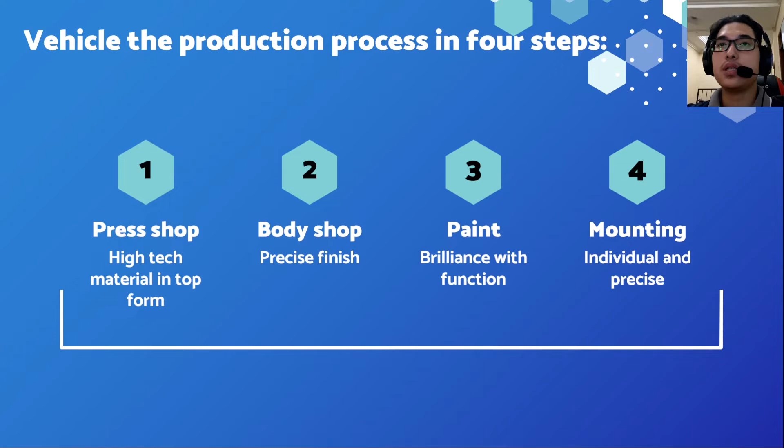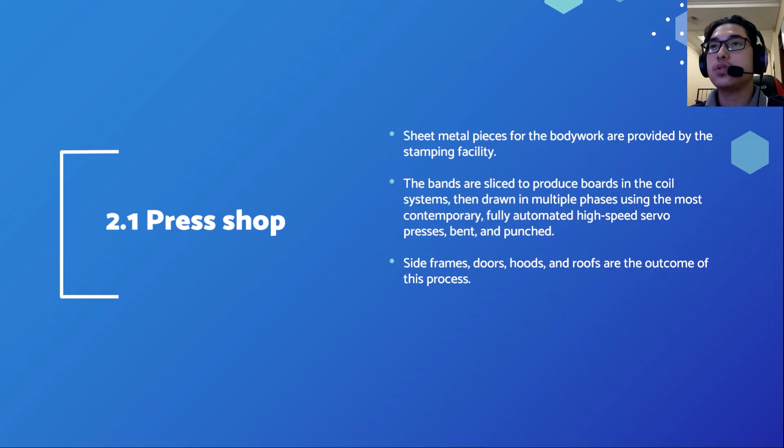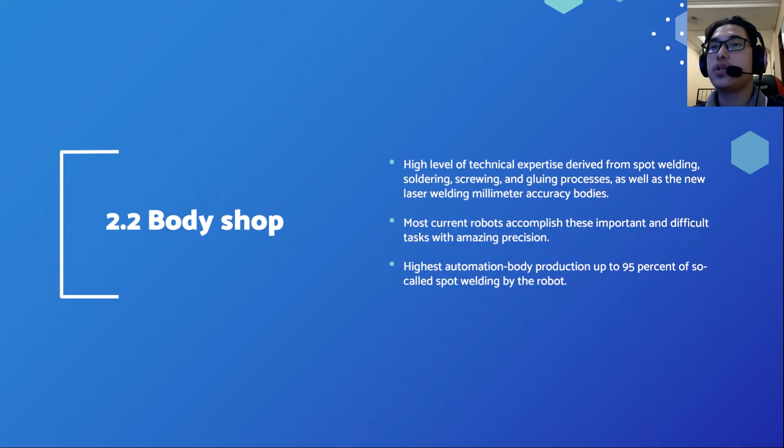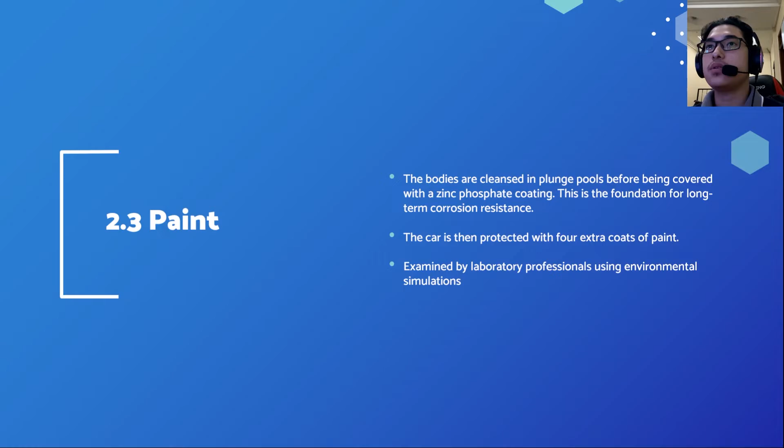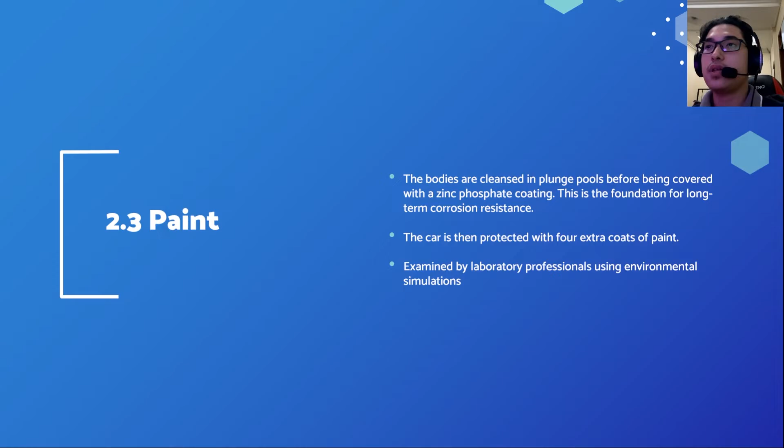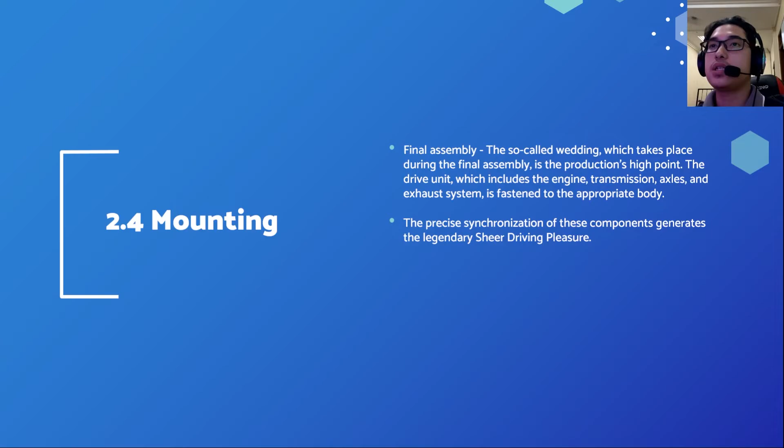And for 2.5 is technology applied. For BMW, it applies additive manufacturing. The purpose is to drive down production cost and timeline so that the company will make more profit. It starts with Henry Ford, the inventor of the assembly line. The automobile industry has long history in developing and implementing the technology to improve the production efficiency. But recently, automotive makers resorted to additive manufacturing because it takes a digital model and prints it layer by layer to create a part or object of the product.

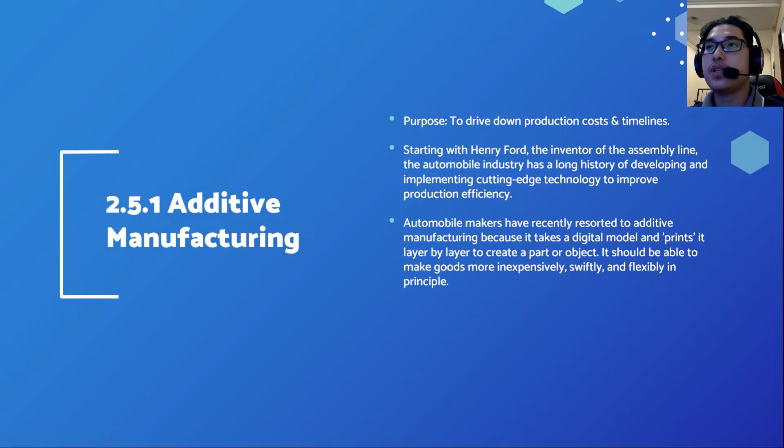It should be able to make goods more inexpensively, swiftly, and flexibly in principle. How is this applied in BMW? The company's primary aim with AM is to reduce cost and time, allowing it to bring new goods to market faster and for less money, as well as to create items for less money. This will make the company more profit.

Unlike with other methods, digital models can also be tweaked and changed instantly. Once successfully prototyped, BMW claims that AM has the potential to significantly reduce production time, as it is claimed to be 5 to 10 times faster than current technologies in the market. That's all for me, thank you.

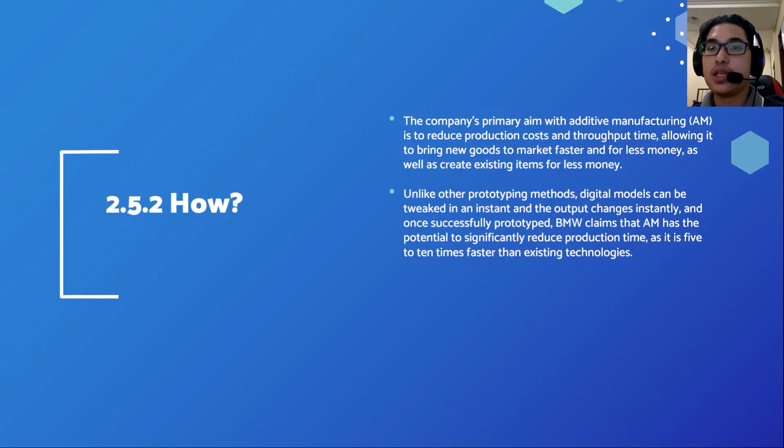Now that we have presented about how the manufacturing process works, I will present about the defects or quality issues that occurred or can occur during the process.

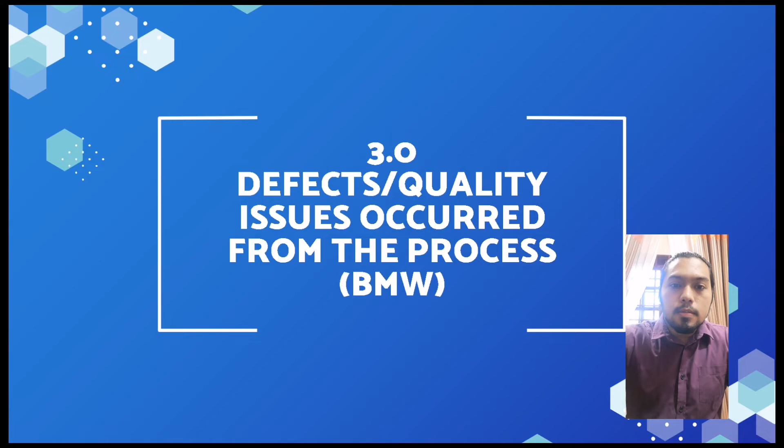As we have told about the press shop, there is a stamping process that happens in the press shop. This stamping process can give many side effects, but there are three common side effects that can occur during this process. First is wrinkles. Second is splits and risk of splits. And the third one is spring back.

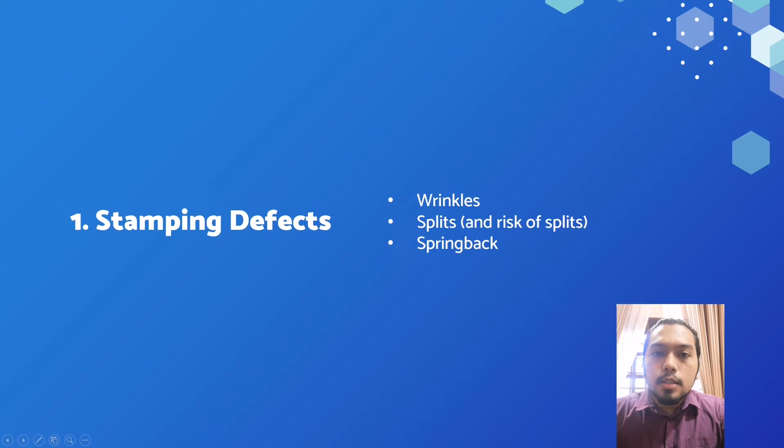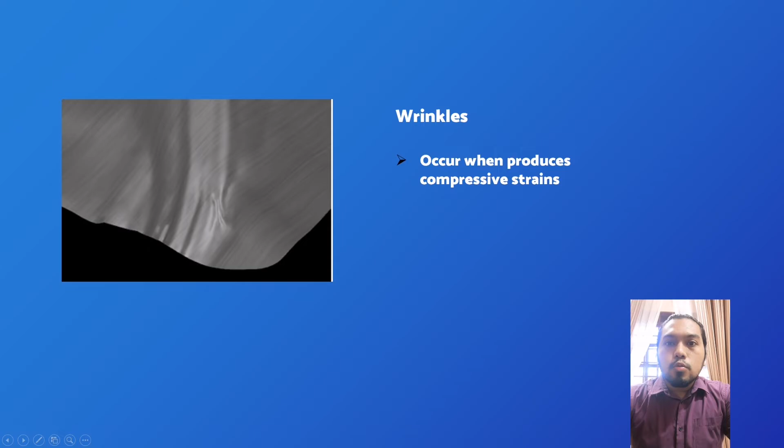Okay, we go to wrinkles. Wrinkles occur when the sheet metal stamping process produces compressive strains that push material together. This will cause the material to overlap with each other.

Next we go to splits and risk of splits. Splits occur when the strains cause the material to become thin beyond the material's safe limits. To resolve the issue, we must make a careful consideration of the material types and material thickness.

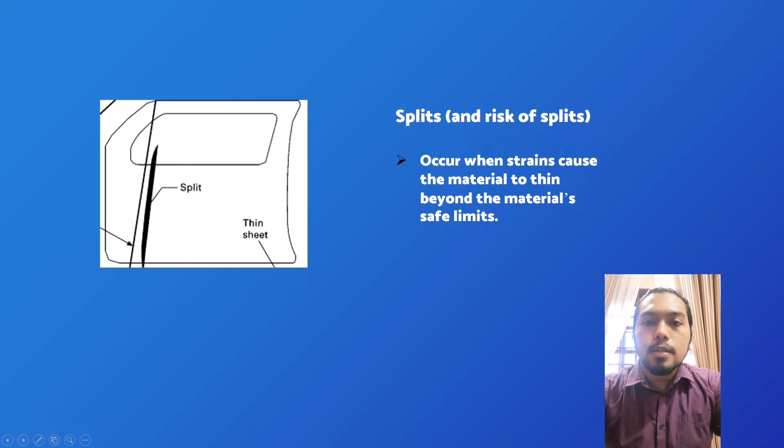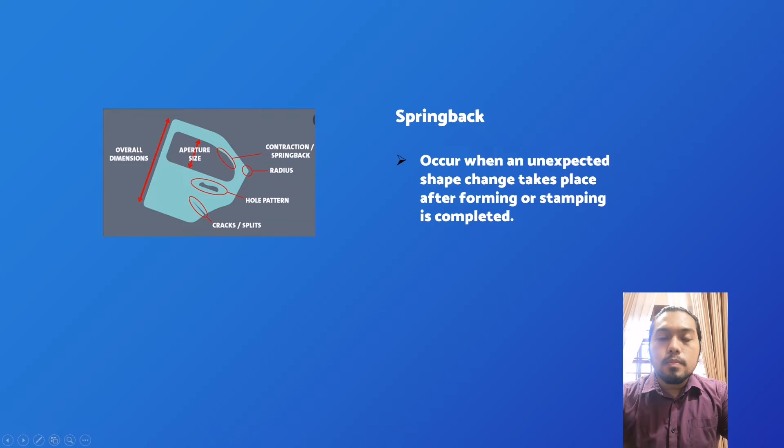The last defect of the stamping process is spring back. Spring back occurs when an unexpected change of shape takes place after the forming or stamping process is completed.

Now we go into assembly defects. As the assembly process includes soldering, brazing, and spot welding, there is a variety of defects that can occur, including cracks, porosity, slag inclusion, and gap or flush.

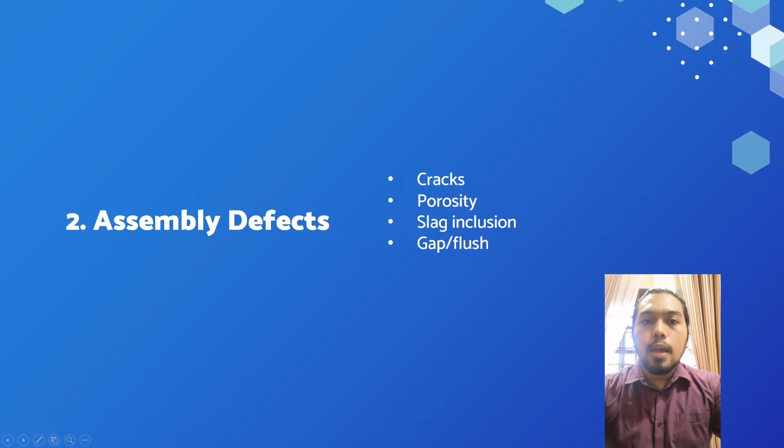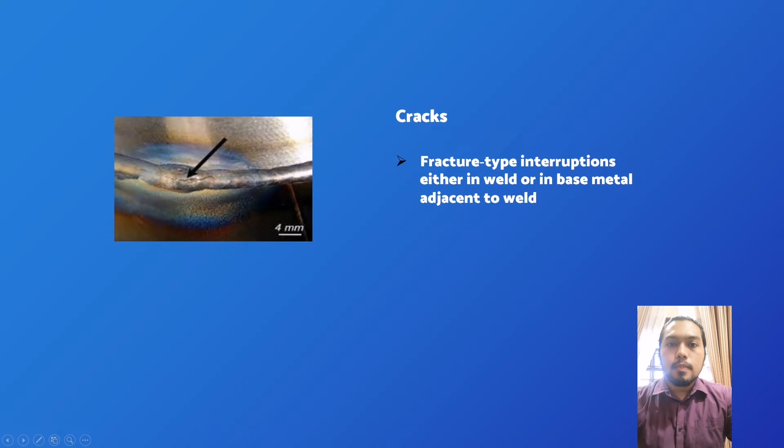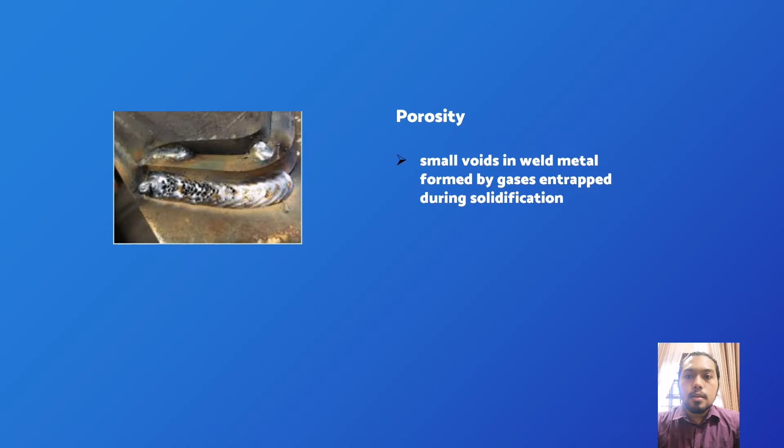First is crack defects. A crack is a fracture type interruption that occurs in the weld or in the base metal. Next is porosity. Porosity is small voids in the weld metal formed by gases that are entrapped during the solidification process.

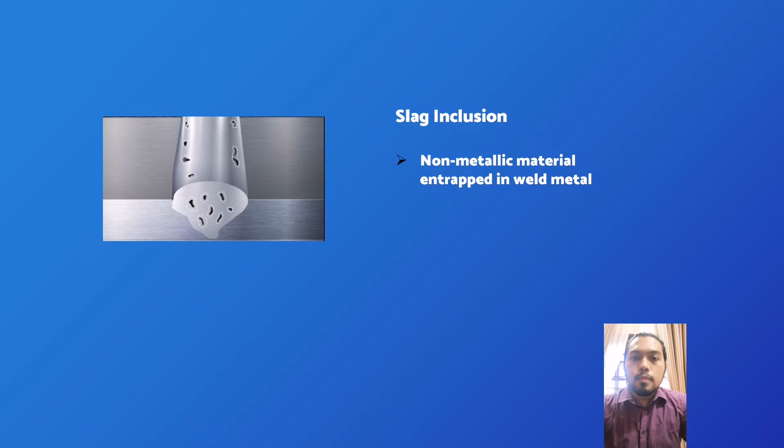Next is slag inclusion. Slag inclusion is almost the same as porosity, but slag inclusion is when a non-metallic material is entrapped in the weld metal.

As the assembly process also includes soldering and gluing, these are the other types of defects that can occur during the assembly process, such as sunken joints, shadowing, solder shorts, incomplete joints, or using too much or too little adhesive.

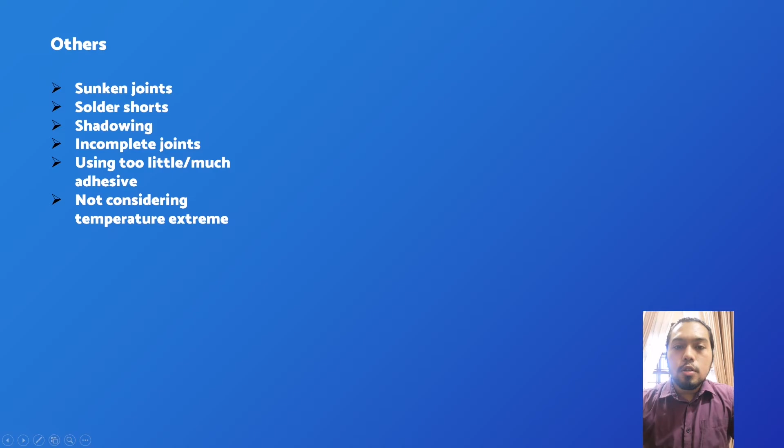For the last one is gap and flush. The fit alignment of body panels during assembly can create a gap and flush defect that happens during the press shop where the stamping process happens. When the stamping process that creates the door or roof has a manufacturing defect, this gap and flush can happen when the assembly process is in working.

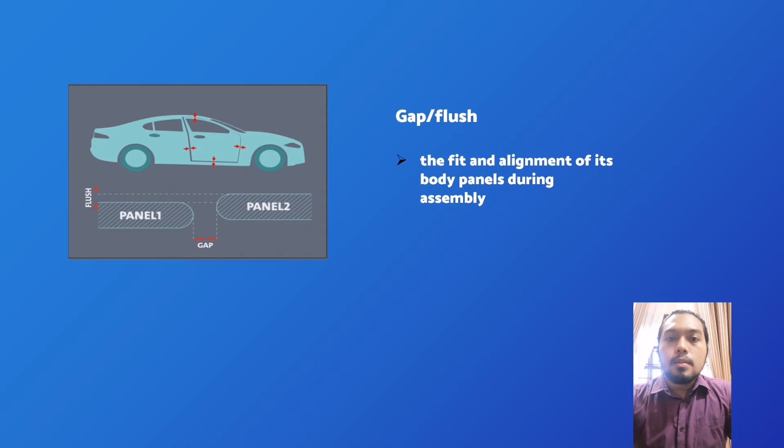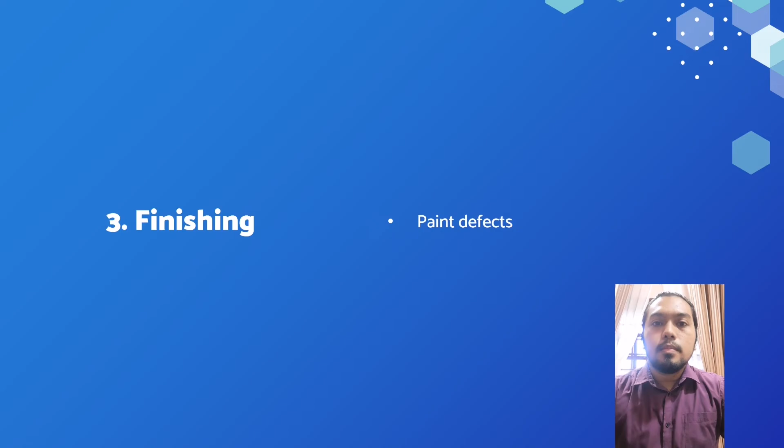The last one is finishing. For the finishing part, we have paint defects that can occur during the finishing process. These are the common paint defects that happen during the finishing process, such as orange peel, scratches, contamination or dirt, or color defects.

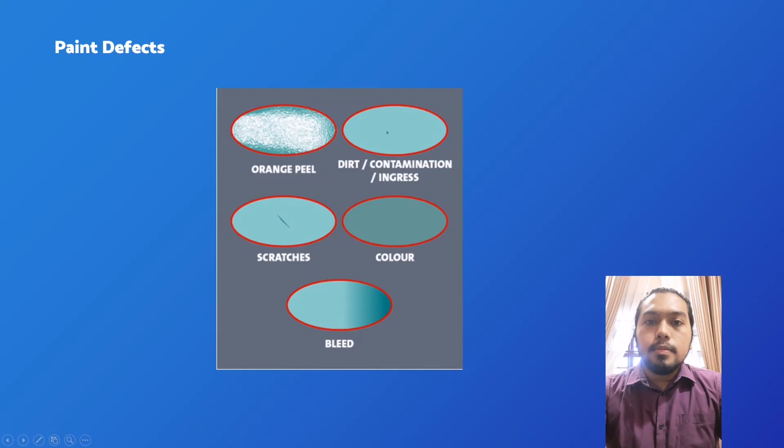There are four main components that have been used in their production. First, smart data analytics, mainly used in the assembly line, about evaluating data and improving the process. Secondly, smart logistics, where they use IoT and cloud computing to provide real-time information so that delivery of supplies can be adjusted.

Thirdly, innovative automation, meaning the use of intelligent solutions to relieve employees. This robot or automation will work side by side with employees without failure. For the fourth, additive manufacturing, known as 3D printing, and the company has used it since 2010.

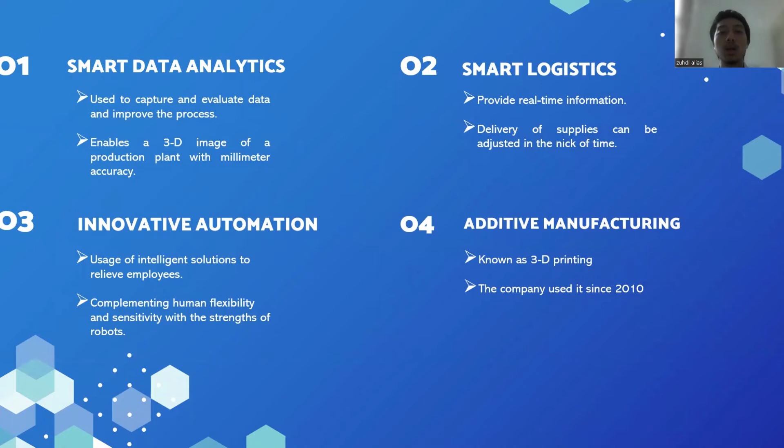The example of smart data analytics is using AI to check the model inscriptions against the desired product during the final inspection. If the product is not correct, the AI alerts their employee. Virtual reality is used for simulating an interactive 3D environment. They apply it in their R&D, research and development department, so that they can optimize their product design.

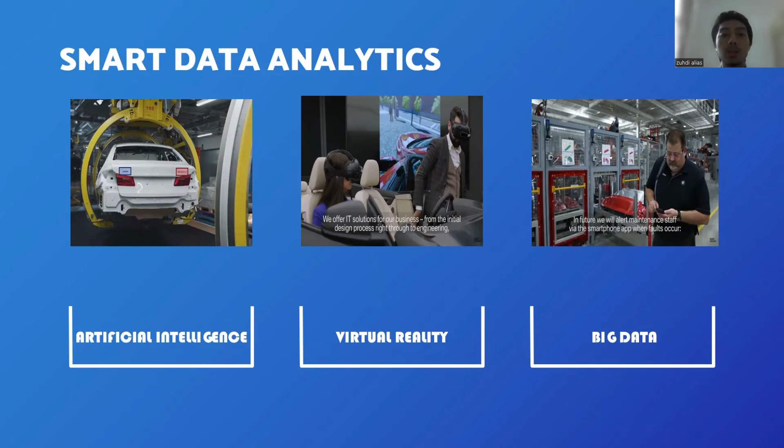Big data is used for the maintenance process at their factory. It will tell the employee when and what kind of service to do at their factory using a smartphone. Examples for smart logistics are autonomous cargo trains and smart transport robots.

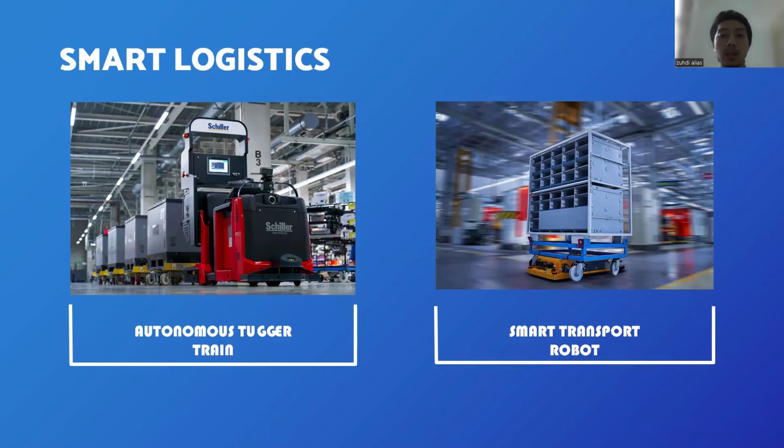Autonomous tugger trains use laser signals to navigate themselves independently throughout the production halls, and smart transport robots use IoT and cloud computing to select the best route to their designated destination for themselves.

An example of innovative manufacturing is collaborative lightweight robots and exoskeletons. These two provide extra strength and improve the accuracy for the employee doing their work.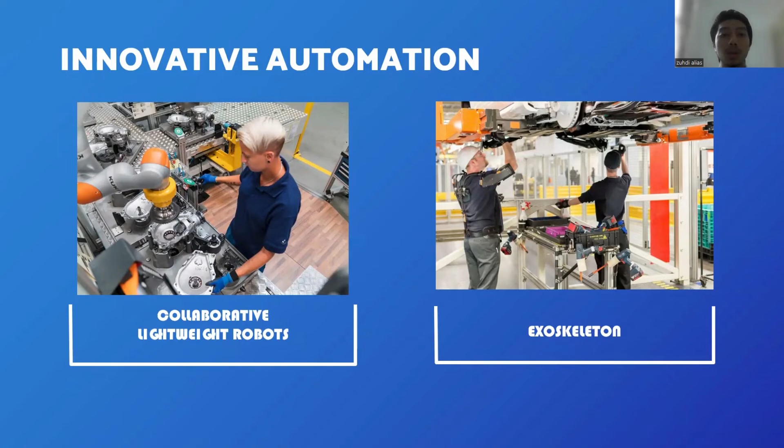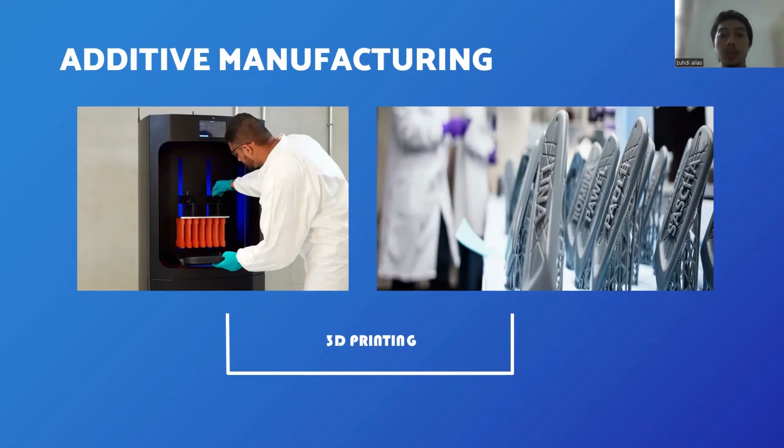3D printing, which is additive manufacturing. The product is used for the pedal, clutch, engine cover, and many more complex designs.

And there's others too, which is drone, to search empty space at their warehouse using drone, so that will save more time during the delivery process.

Innovative nut-setter algorithms analyze hundreds of bolt connections in car production and help detect faults early. A green light signifies the fault is okay.

Augmented reality helps to redesign their production line without any major shutdown, so it's more safe in terms of cost, production, and time.

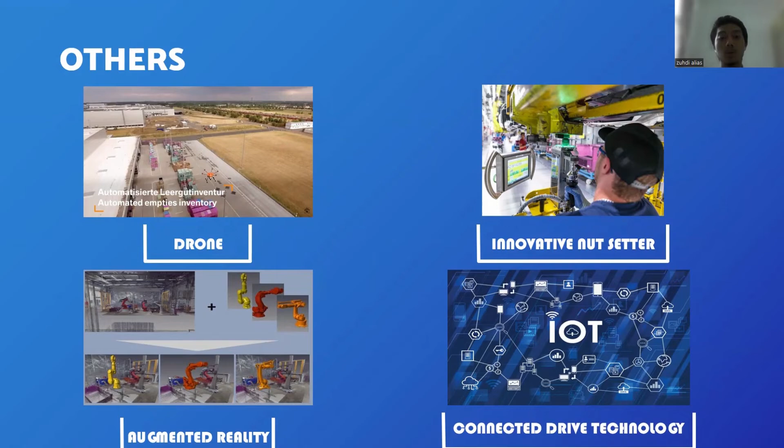And for IoT, the product of IoT is connected drive technology. It is for connecting the vehicles to the employee by using internet. It can help employees know the problem of the car after sales and help the customer do their service regularly by communicating with the employees through IoT technology, which is internet.

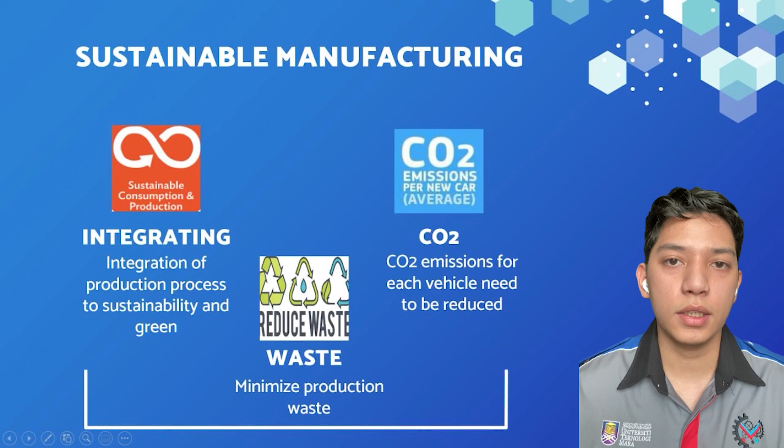Essentially, sustainable or green auto manufacturing aims to minimize production waste and the environmental impact of vehicle production. This is typically achieved by adapting product designs, manufacturing processes, and workflow principles to more environmentally friendly standards, and focuses on cutting CO2 emissions. Next, we go to the actions and targets by BMW to make sustainable production.

For decades now, the company has been setting itself consistently sustainable standards. Nowadays, it focuses on cutting CO2 emissions and raising its resource efficiency. BMW is active in numerous fields.

It emphasizes that BMW is pursuing holistic sustainability in the way it thinks and acts, using clear targets to shape the mobility of the future.

The group insists on transparency for its targets, which have all been clearly communicated for the period from now until 2030. They include greenhouse gas emissions will be reduced based on CO2 saving plans. CO2 emissions at the production of BMW facilities are to be lowered by 80% globally.

BMW also intends to have the most sustainable supply and manufacturing chain in the entire sector. Not only are the cars manufactured by BMW electric, but the vehicles used in the production and manufacturing of BMW vehicles also run on electricity. At the BMW factory in Malaysia, over 500 logistics and production vehicles, as well as transportation, tow trucks, sweepers, and machineries are electrified.

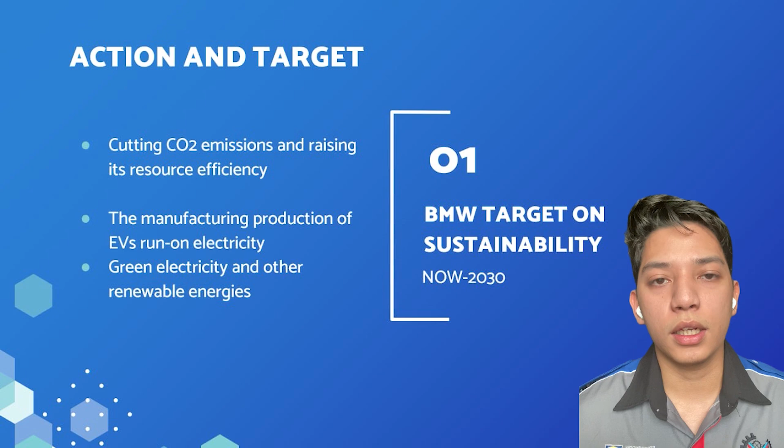Okay, to the next slide, BMW focuses on sustainable production. BMW Group production facilities utilize a variety of methods to achieve an ambitious goal: using exclusively renewable energy in the production of premium vehicles around the world, in South Africa.

Originally, the BMW plant in South Africa, which produced just under 300 vehicles a day, was powered by a coal-burning power plant. As the property sits atop large lignite coal reserves, at the time only 2% of energy came from renewable sources.

BMW not only wants to make cars low emission, but also wants to produce them in a climate-neutral way. For this, the company's goal is to increase the share of alternative energy used in production to 100% in the coming years. BMW Group currently meets 51% of its energy needs through renewable sources.